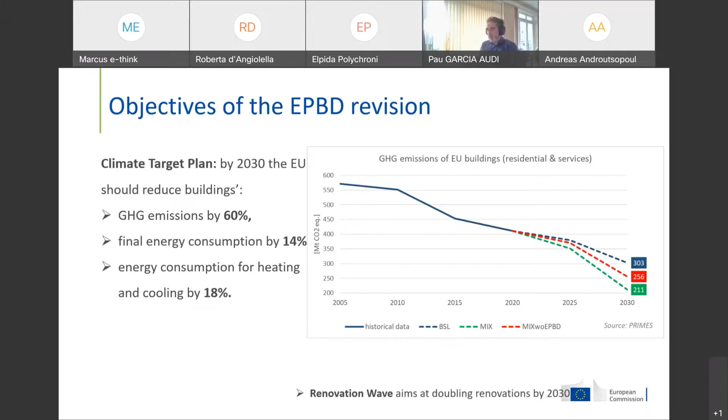There are four main focus areas in the EPBD. The first one is renovation. There are a number of initiatives there, but basically the EPBD aims to trigger as many renovations as possible, and then it aims to ensure that those renovations are of high quality and standards.

For these reasons, we have a number of measures, particularly the minimum energy performance standards, an upgrade of the energy performance certificates, but also the introduction of the building renovation passports and the national building renovation plans.

In the focus area of decarbonization, we also have a number of initiatives that aim to make sure that buildings are not just much more energy efficient, but also as decarbonized as possible. For this, we introduced the definition of zero emission building, which will be a new standard for all new buildings from 2030 onwards.

We also start to evaluate how we need to consider whole life cycle carbon emissions. There are no requirements to achieve a certain level of whole life cycle carbon, but there are requirements to start reporting on these. And finally, there is a number of measures to allow the phase out of incentives for fossil fuels and a new legal basis for outright national bans.

Then we also have the fact that there is a lot of new technology coming into the market, so we have a focus area on modernization and system integration. This particularly makes reference to the infrastructure for sustainable mobility, support to smart technologies through the smart readiness indicator, and also making sure that the buildings are fit for their purpose, which is to make sure that they are a safe and comfortable space.

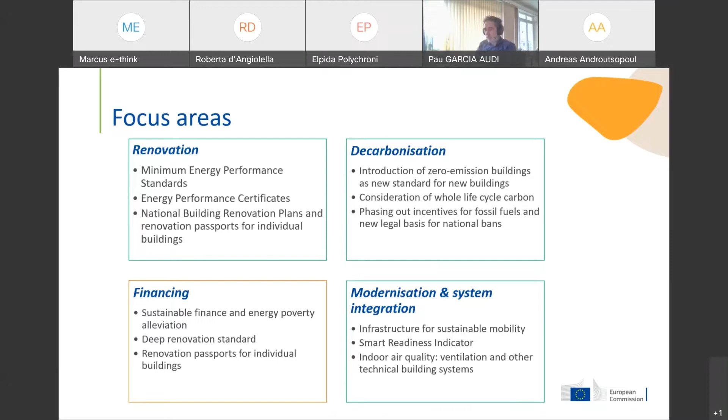So on the main provisions for new buildings, as I mentioned, we have a nearly zero energy to zero emission building provision. As you know, we already have the nearly zero energy building requirement, which is in place since the end of 2020. We are now updating it to a zero emission building.

This is a type of building that will be ready for 2050. The main change is that a zero emission building will need to have a very high energy performance, and the remaining energy consumption will have to be 100% supplied from renewables on site.

It can also be supplied through district heating and cooling or energy communities, or also in some cases through the grid. So there is a stronger incentive there for on-site renewables and efficient district heating and energy communities.

We really want to make sure that this link with on-site and the vicinity of the building is as strong as possible.

These buildings have to become the level to be attained by deep renovation also as of 2030. So the deep renovation is now redefined, and it's to bring a building up to this zero emission building standard.

We also, as I mentioned, introduced the requirement to calculate the life cycle global warming potential of new buildings. This has to follow the Level(s) framework, and it's purely for information. There is no requirement to reach a certain level, a maximum or minimum level of emissions.

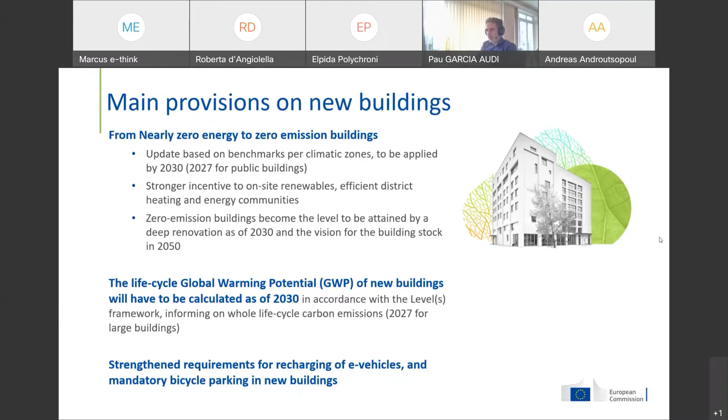So on existing buildings, perhaps the star of the recast of the EPBD is the introduction of minimum energy performance standards. This is a specific measure to make sure that we trigger the renovations of the worst performing building stock, which is where the most potential for energy savings is.

There are different steps for different kinds of buildings. So for public and other non-residential buildings, they need to reach at least Class F by 2027 and at least Class E by 2030. In the case of residential buildings, they need to reach at least Class F by 2030 and Class E by 2033.

We recognize there the fact that for residential buildings, it's more complicated and we need more time to adapt. Member states need to set up timelines for further improvement of the building stock in their building renovation plans beyond these 2030 and 2033 timelines.

These requirements don't come alone. There needs to be a supporting framework specifically, or particularly, for vulnerable households, and make sure that we monitor the social impact of these measures.

The other main provision on existing buildings is the introduction of national building renovation plans. They substitute the long-term renovation strategies. They are better integrated with the whole NECP process, and they provide a common template with common elements for all member states.

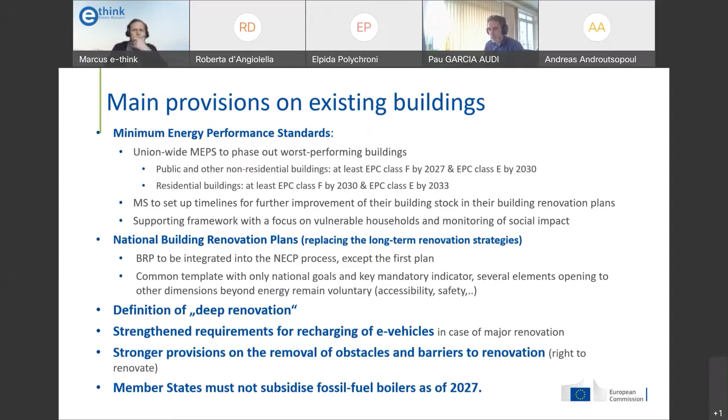Other measures include the definition of a deep renovation, which is a renovation that brings a building up to zero emission building level. There are also strengthened requirements similar to new buildings for recharging of electric vehicles, and stronger provisions on the removal of obstacles to and barriers to renovation.

Then there is a clear ban for the subsidy of fossil fuel boilers as of 2027. We also make it easier for member states if they want to introduce bans on the use of fossil fuel boilers in their territories.

On the main provisions on information tools, this is I believe the main topic of discussions for today. The main one is the energy performance certificates. There are a number of measures there.

On the harmonization and coherence at EU level, we've introduced a rescaling and relabeling of the system.

So from 2025 onwards, all energy performance certificates will have to be based on a harmonized scale of energy classes.

This still allows for flexibility to member states. Because the building stock in each member state is very different, and there are also differences in the calculation methodology, we recognize the need for this flexibility, but at least we wanted to make sure that we introduce common elements in the way these classes are defined.

So A class is now defined as a zero emission building, which has a clear framework at EU level, and the G rating building is representative of the 15% worst buildings in that particular member state. The EPC is also updated with a common template, which has energy and greenhouse gas emissions indicators.

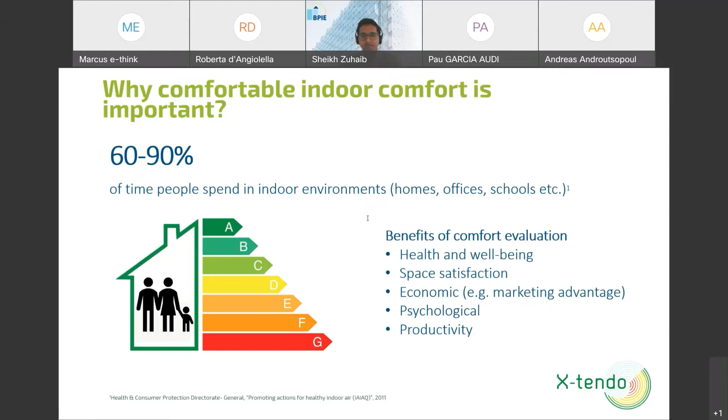One of the projects, like ALDREN from H2020, has looked into this aspect, as have several other rating systems. So we took inspiration in order to understand what criteria we really need to take into account, because comfort has always been a very complex topic to look into and evaluate, and to actually provide information which is very useful to the end user, yet in a simple form.

So we have looked into these existing rating systems very deeply. We considered all our options and then worked on developing a comfort feature which could fit well into the EPCs.

So what were the main objectives in X-tendo? What were we aiming at? We were aiming to enrich the EPCs with key indicators of building performance other than energy efficiency. The idea is that we have several parameters that show the energy efficiency of a building on the EPC, but the indicators that actually predict or tell you what the comfort level inside the building is are missing at the moment, and hardly present in any of the EPCs being produced in different member states.

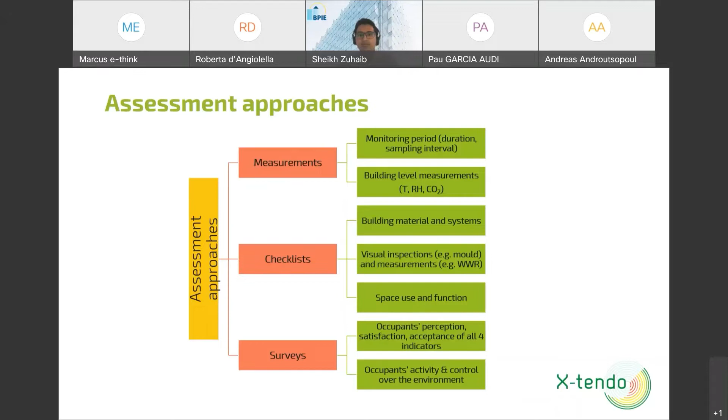So what is the solution that we have designed for this feature we've been talking about? There are 2 solutions that we have developed. One is known as the Comfort Operational Rating Procedure (CORP), which is useful for new buildings and renovated buildings that are already occupied, making it a more comprehensive assessment than for buildings which are not occupied. We also developed an assessment for buildings which are very new, recently constructed and need to be rated, and also buildings which are renovated and still require certification. So we developed a Comfort Asset Rating Procedure (CARP) for those kinds of buildings.

The main difference between the two is that CORP has measurements as well as a comprehensive checklist and surveys to calculate the rating, whereas in CARP we don't have measurements, only checklists, and there are no surveys because there are no occupants involved. It's basically an assessment of a building which is recently constructed. So we developed these 2 solutions to fit the needs of the industry.

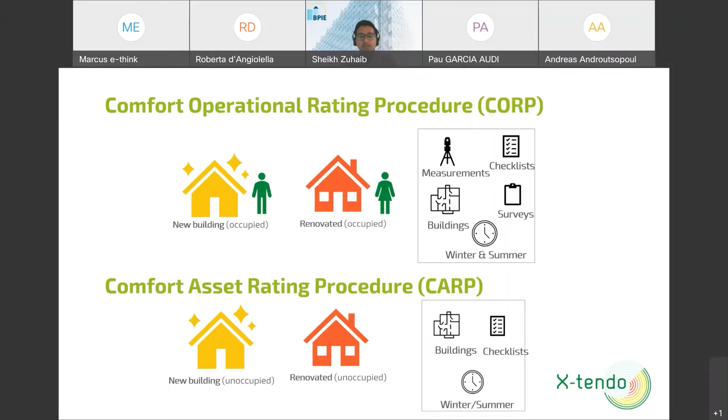What building types are being tested? After developing the feature, we wanted to test it in different buildings, but the development of the feature was limited by certain factors. In residential buildings, our assessment of comfort is primarily based on the space which is occupied most of the time or for larger hours throughout the day, that is the living room.

For office buildings, we have taken into account a typical office less than 15 square meters occupied by 1 to 2 people. And in a school, we have taken a representative space of a classroom which is less than 50 square meters. At the moment, the limitation of the feature is that we have restricted the evaluation of the comfort feature to certain zones, as we cannot evaluate the whole building very cost effectively. But these representative zones are the ones occupied most of the time throughout the year in different seasons. That is the primary aim of taking this into account.

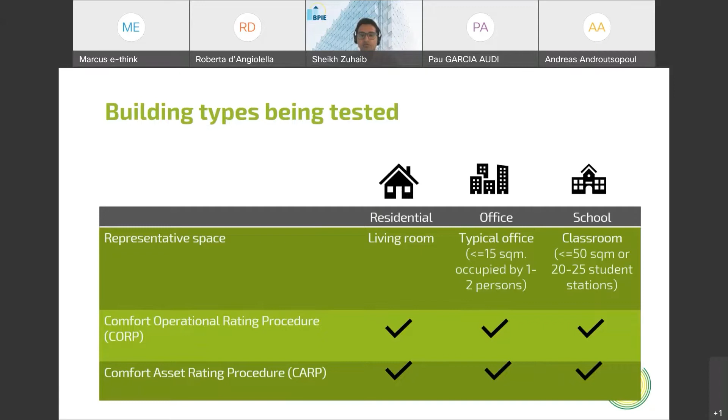How do we score CORP and CARP? Both assessments have a similar way of rating the comfort inside the building. As you can see, we have a combined rating, which is a comfort rating, and it is composed of 4 indicators: thermal comfort, IAQ, visual comfort, and acoustic comfort.

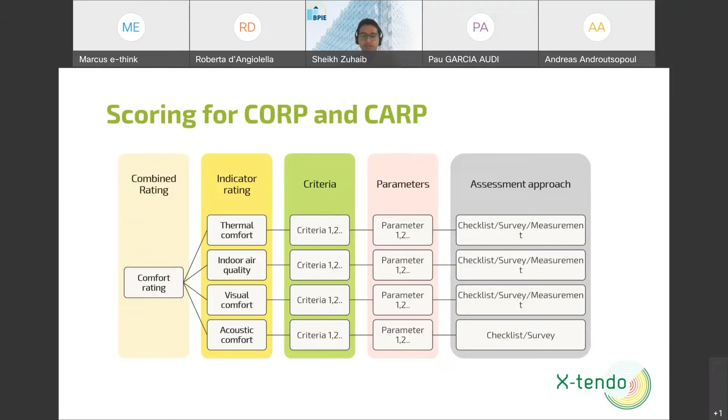But to assess each indicator, we have a criteria. This criteria has certain parameters which are assessed using the 3 approaches I already mentioned: checklist, survey, or measurements. So the scoring follows this pattern and finally combines to a comfort rating. In the next slide, I'll explain how different weights are assigned to these parameters and criteria, and finally how we arrive at a rating. Next slide, please.

This is an example for evaluation of thermal comfort. In the first pie chart, you see there are 4 aspects that we are assessing in the comfort rating: thermal comfort, IAQ, visual comfort, acoustic comfort. By default, we have kept the weightage of all the indicators as equal. But to understand how weighing works, we move on to the second level, the criteria level. Thermal comfort has 4 criteria in it: thermal sensation, summer comfort, winter comfort, and operational control.

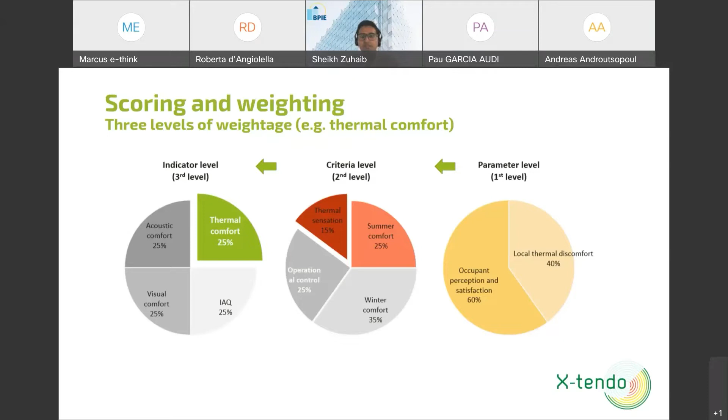Further, to assess thermal sensation, we have two parameters: local thermal discomfort and occupant perception and satisfaction. Each of these parameters and criteria have been given a weight, and finally they are calculated to determine the rating for thermal comfort, which is combined with the rest. So there are 3 levels of weighing that we have taken into account in the calculation tool. Next slide, please.

Thermal comfort indicator is composed of 4 criteria: winter comfort, summer comfort, thermal sensation, and operational control, and we have several parameters under them to calculate the rating for thermal comfort inside the building.

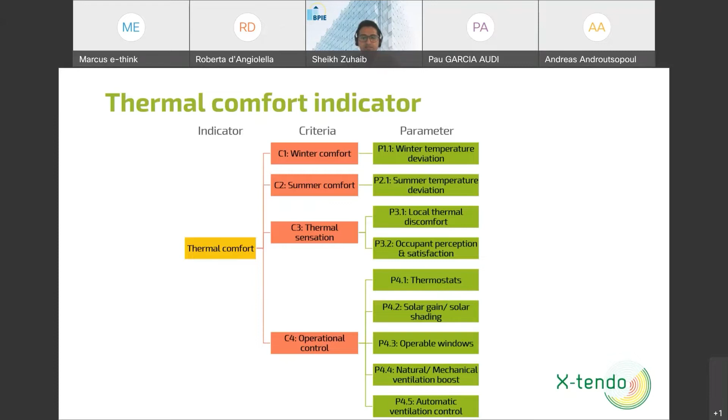Similarly, we have the indoor air quality indicator, where we are assessing contaminants inside the building, ventilation, indoor air quality satisfaction capturing occupant perception, and also operational control.

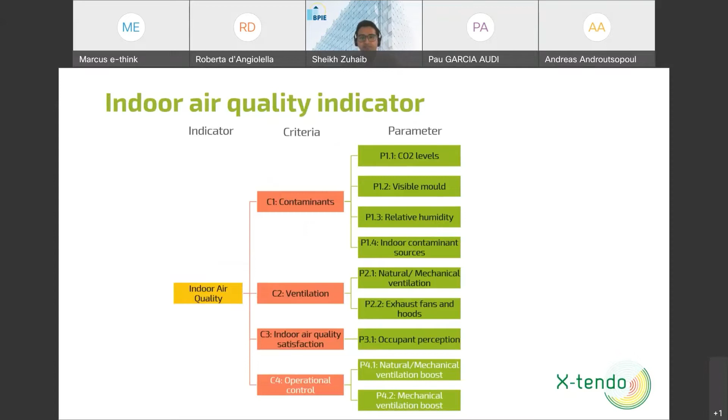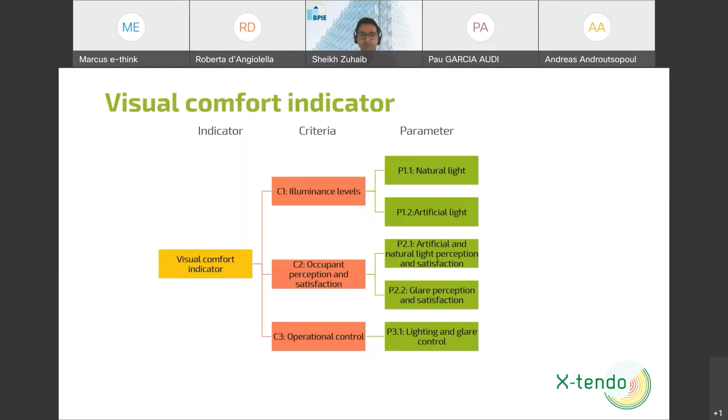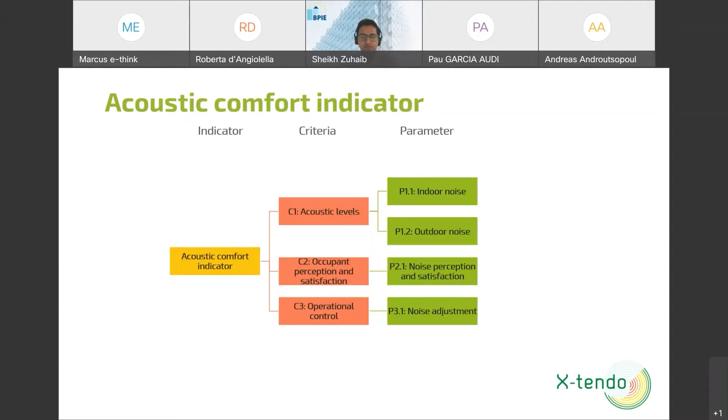So as you see, I've given a very brief insight into the methodology, the main indicators and parameters we are looking at, which is quite comprehensive, and in quite little time I had to share that with you, but it was an overview.

Next slide, please. Five minutes, Sweep. Thank you.

Now this is a combined score for thermal comfort, acoustic comfort, IAQ, and visual comfort. I'll show you what is individually given for each indicator in the next slide.

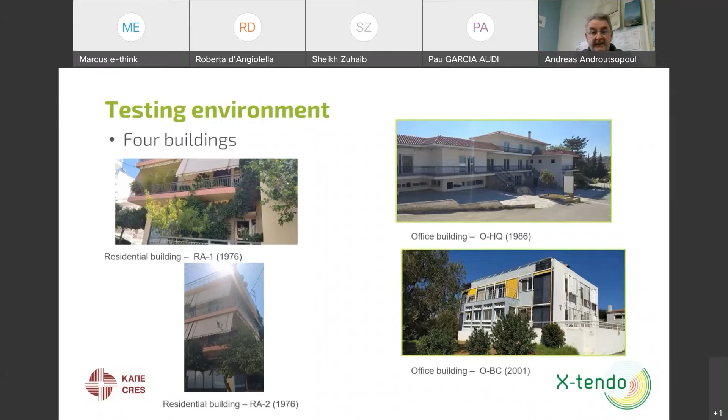Next slide, please. Talking about sensors, the equipment we used was a sensor which could continuously measure air temperature, relative humidity, and CO2 emissions. You can see it at the center of the screen. Additionally, light measurements were taken from a lux meter on specific days and times in every room that was tested.

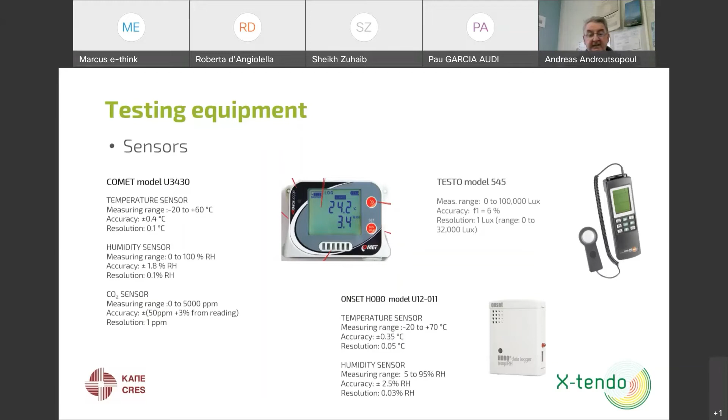Additional to that, we also had to be able to measure accurately the ambient temperature, so an extra sensor was placed in the apartments. You can see at the bottom of the screen an Onset HOBO sensor, which is also data recording, while the other sensor was a PT100, placed very close to the offices area, gathering data on a 1-minute basis. Next slide, please.

So the procedure that we followed actually was one way or another already mentioned by Sheikh. It was firstly to gather as much data about the buildings as we can, install the measuring equipment, try to complete to the best we can the checklists. We had also conducted surveys, and they had to be conducted during the measuring period so that we take the right feelings from the people that were using the rooms at the times of the measurement. Then download or analyze the data, and finally be able to put all this information in the tool and to be able to provide final results.

So we come to the part that I can give you some information regarding the results. Now, this is for the first apartment. The measurements were taken in the living room area. You can have a sketch of the apartment with the positioning of all the sensors. The red dots refer to the lighting, the lux meter measurements. They were spot measurements, while the green triangle refers to the sensor for temperature, relative humidity, and CO2 emissions.

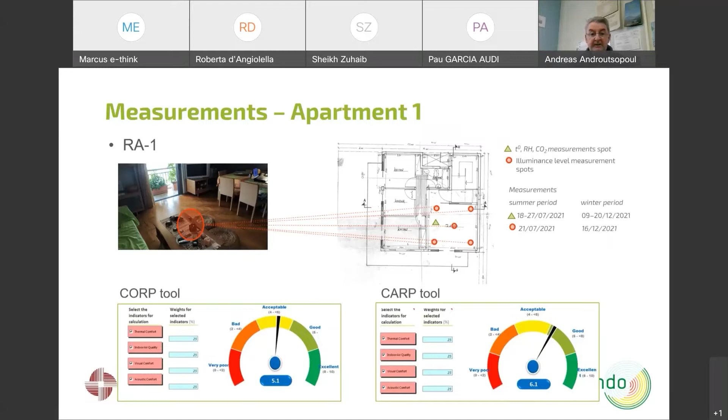Same information regarding the second apartment. Again, in the living room, you can have a look at the living room and the places of all the sensors. The results are quite similar. For the CARP, we actually got exactly the same result, 6.1, while the CORP was 5.2 final results. If we could move on to the offices.

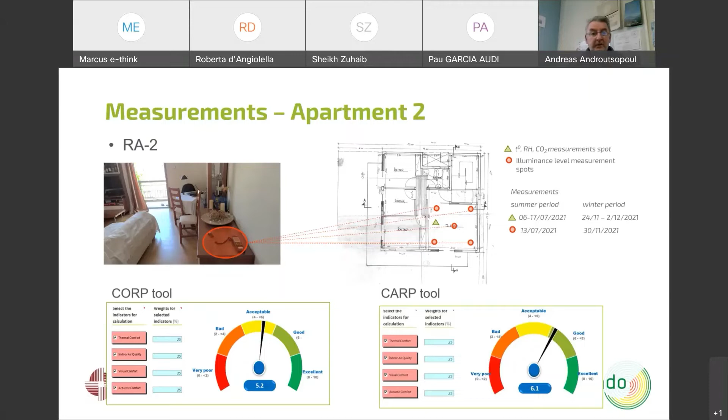Okay, we see the first office room. It is a room occupied by 3 persons. However, due to the COVID situation, we normally used to find only 1 person in the room during the period of the measurements. You can have a look at the area this office is situated in relative to the whole building. It is a rather representative room, and again, the same kind of measurements were taking place during both summer and winter periods.

And the results from the use of the tool during the asset rating, to the right, I'm giving you the high numbers first and then the low numbers. The CARP tool provided us with a rather high comfort index of 6.8, while the CORP tool ended up with 5.4 final results.

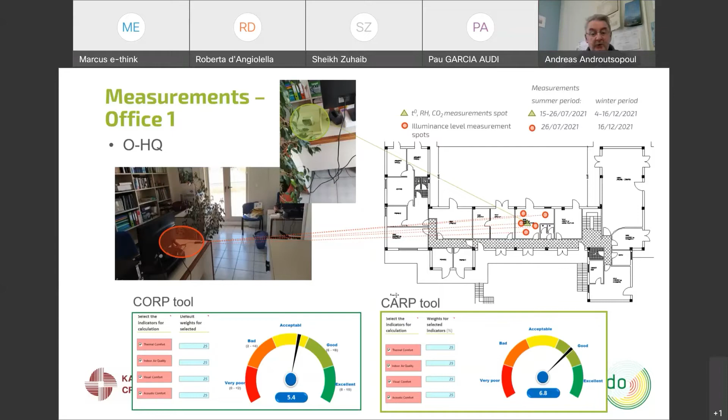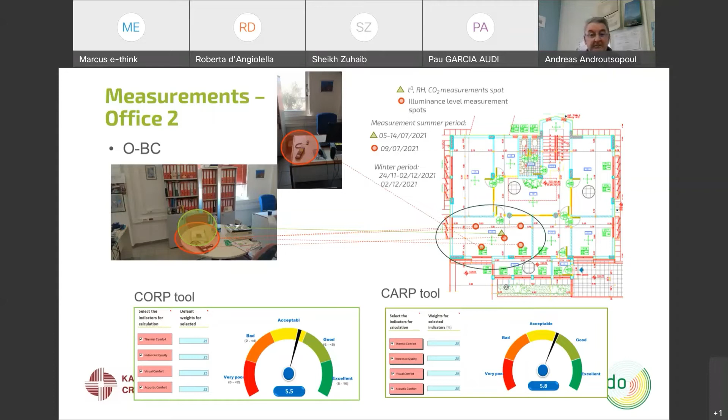And if we want to have a first idea of discrepancies between the results, we can have a look at the results taken. We have a range regarding the CARP tool from 5.8 to 6.8, and from the CORP tool from 5.1 to 5.5, very stable results. But the difference between the two actual procedures ranges from 5% to 21%. The most stable difference was situated in the apartments, with the larger one in the office room.

In fact, the use and preparation of this comfort picture in order to get some final results is rather time consuming, and we have to take this into account. That's why the assessors should be well trained in order to effectively use this kind of helping hand regarding the evaluation of comfort.